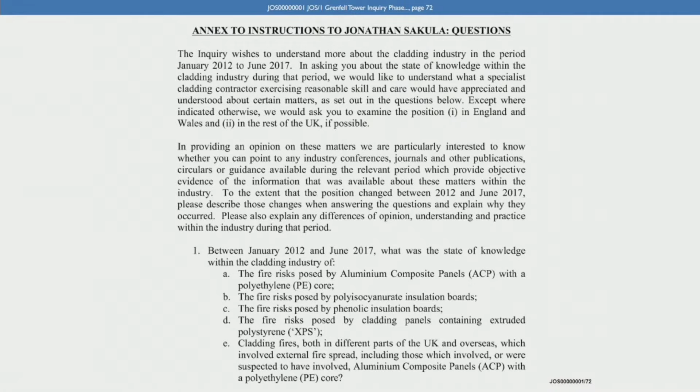And then we can see that below that you were asked a series of questions about the state of knowledge within the cladding industry of various matters, including in particular regarding the fire risks posed by the use of ACM panels, including with a polyethylene core. Now, I'm not going to read out all those questions at this stage. We will revisit many of those during your evidence today.

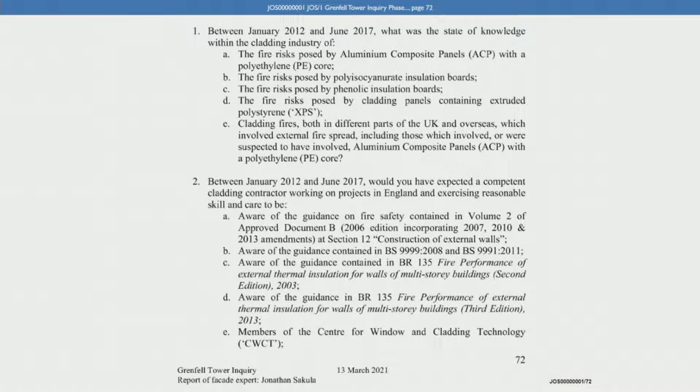Now, in response to those questions, you have produced a written report. If we go to the front page of that, so that's, yes, there we have it. So this is the front page of your report of the facade expert, and we can see there that it's dated the 13th of March 2021. And if we could go within the report to page 72, we can see the same date, the 13th of March 2021.

Yes. And is that your signature there? Yes. And to confirm, you've structured your report by chapter, each of which deals with the questions you were asked in turn. Is that correct? Yes. And are the factual matters set out in your report true to the best of your knowledge and belief? Yes. And does your report accurately set out your true and professional opinions on the matters you were asked to consider? Yes, it does. Thank you.

Now, I want to ask you some questions first about your background and experience. Now, in Section 3 and Appendix B of your report, you've outlined your background and experience relevant to matters to this inquiry. If we can turn to Section 3 at page 18 of this report, there you've set out in detail your background.

I'm not going to go through the detail of all of that, but I'm going to highlight some key points, which if you can just confirm. So is it right that you've worked in the construction industry for over 45 years and in the facade industry in particular for almost 30 years? Yes. And you have a degree in engineering from the University of Cambridge, and you are a chartered engineer, a fellow of the Institution of Structural Engineers, and a fellow of the Institution of Civil Engineers.

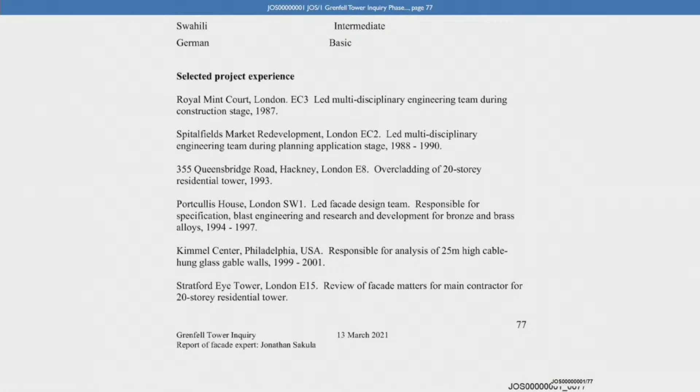At the bottom of that page, you've listed a number of projects under the heading Selected Project Experience. The final entry on that page is the Stratford Eye Tower, London E15. You say that was a review of facade matters for the main contractor for a 20-storey residential tower. Can you help us, roughly when was that project? When did that take place?

That would have been about 2002, 2003. And it sounds like that was a building over 18 metres if it had 20 stories, yes? Yes. And again, was that a refurb project or a new build? That was a new build.

And what did your review of facade matters entail? Well, in that case, I was working for the main contractor as the client, my client, and was effectively helping the contractor deal with technical submissions from their own specialist subcontractor. So it would have been reviewing drawings, reviewing the technical submissions, and so on. Yes, I see, so acting as a kind of checking mechanism for the main contractor in terms of the subcontractor's facade design. Yes.

And did that review of facade matters extend as necessary to checking compliance with building regulations and associated guidance? No, I don't recall it involving that. Do you have any other experience of rain screen overcladding projects on buildings over 18 metres? Not of overcladding projects, no.

Now I want to ask you some more general questions about the UK cladding industry. If we look at section 5 of your report on page 21, we can see you provide some information about the nature of the UK cladding industry. I want to pick it up at paragraph 5.1.3, where you say it may be helpful to explain briefly the nature and evolution of the UK cladding industry over the last 50 years.

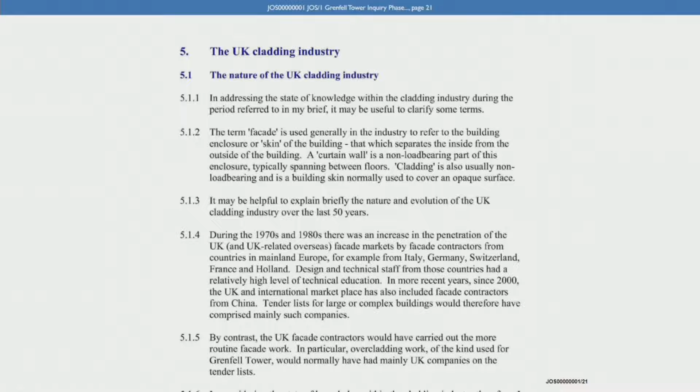You say in paragraph 5.1.5 that, by contrast, the UK facade contractors would have carried out the more routine facade work. In particular, overcladding work of the kind used for Grenfell Tower would normally have had mainly UK companies on the tender lists. So in terms of that paragraph, what type of work are you referring to when you refer to UK cladding contractors carrying out the more routine facade work?

Well, as I've said, overcladding work of the kind used for Grenfell Tower, but I mean also facade work in general for relatively low-rise buildings, maybe 10 stories or so, which didn't involve any particularly complex challenges.

And can you explain why the kind of work done at Grenfell Tower was in that category of more routine facade work? Yes, from a technical point of view, it wasn't particularly unusual what they were doing on the outside of the building. They were putting up rails and panels and insulation inside and so on. That's been done quite a lot in Britain, so that's why I call it relatively routine.

Can you help us understand why that work was ordinarily carried out by the UK facade contractors? Well, I would imagine it's because companies from outside Britain wouldn't have bothered to bid for relatively routine projects. They wouldn't have been that interested in those. They would have bid for ones where there was more of a challenge, and possibly more value for the overseas companies from a commercial point of view. I would say the profit margins on these kinds of projects in Britain would have been less attractive for an overseas company.

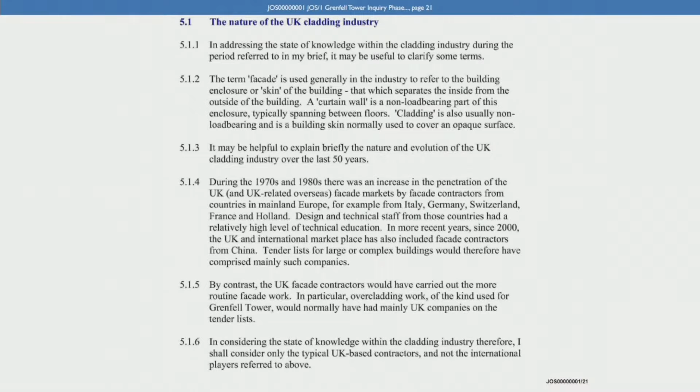You go on to say at 5.1.6 that in considering the state of knowledge within the cladding industry, you shall consider only the typical UK-based contractors and not the international players referred to above. Can you explain why you're only considering the state of knowledge by reference to those UK-based contractors? Well, because I've been asked to address the state of knowledge within the UK cladding industry, so it didn't seem relevant to consider the major international players.

Now, considering what you've said about the European and Chinese contractors penetrating the market from at the latest around 2000, can you help us as to whether the domestic cladding industry benefited from the increased knowledge and expertise of those international contractors when they entered the market? Yes, I would imagine they would, mostly through interchange of staff. People throughout their careers work for different companies and pick up knowledge from the places they worked.

So, in your opinion, did the domestic cladding industry benefit in terms of its technical knowledge and expertise from that penetration by international facade contractors? Yes, I imagine they probably did, yes.

Now, if we can turn to paragraph 2.3.2 on page 16 of your report. You say: in section 5, I give a summary of the nature of the UK cladding industry, differentiating between the UK-based cladding contractors dealing with overcladding projects such as on Grenfell Tower, and the top-tier international facade contractors. In considering reasonable skill and care, I'm considering that which is applicable to UK cladding contractors carrying out overcladding work similar to that on the Grenfell Tower refurbishment. While the level of technical expertise of such contractors may be slightly less than that of their international counterparts, I consider that the expected level of reasonable skill and care is the same.

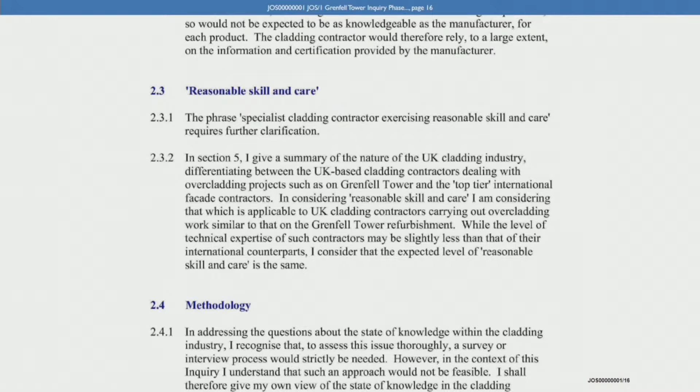So you're explaining the approach you've taken to the expected level of reasonable skill and care? Yes. And even though you've noticed this difference between technical experience and expertise, you've still applied a consistent standard to that question, is that right? Yes.

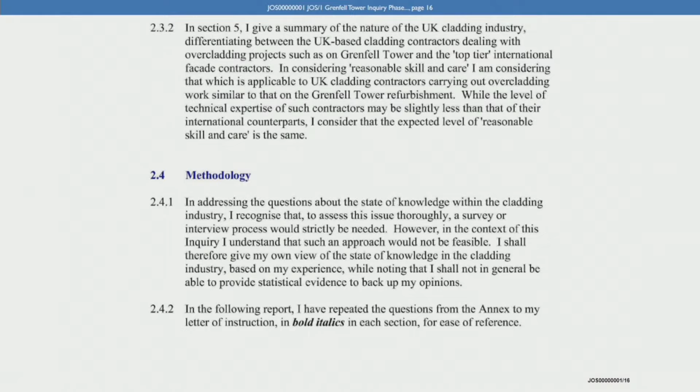You say at paragraph 2.4.1 that in addressing questions about the state of knowledge within the cladding industry, you're not able to provide statistical evidence to back up your opinions, and that your views are based on your own experience. Now, do you accept that the state of knowledge within the cladding industry can sometimes be inferred from widespread practices adopted within the industry? Yes.

And just turning now to manufacturers, I want to ask you some general questions about the relationship between cladding contractors and manufacturers. If we look at paragraph 2.2.3 on page 16, you say a cladding contractor deals with a wide range of products, so would not be expected to be as knowledgeable as the manufacturer for each product. The cladding contractor would therefore rely to a large extent on the information and certification provided by the manufacturer.

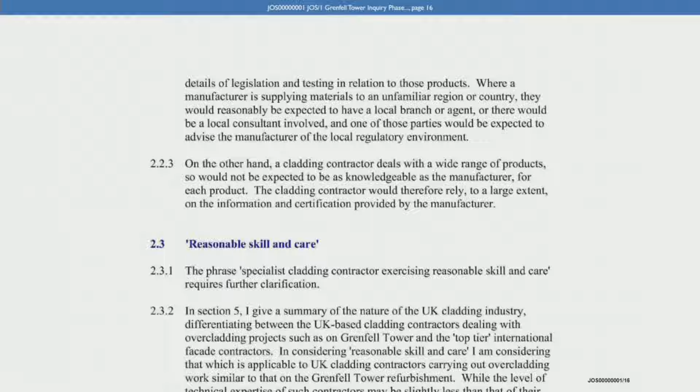Now, when you're talking about manufacturers there, just to be clear, are you referring to cladding manufacturers only, or would you include insulation manufacturers as well? Yes, I would include manufacturers of all products involved in the process, including insulation manufacturers.

And to what extent would you expect a reasonably competent cladding contractor to be reliant on manufacturers for advice about the fire safety of their products? I think they would be quite reliant upon them. The manufacturers are the people dealing very much with their particular product and would be expected to be very conversant with the legislation and about their product. The cladding contractors would rely on them to a very large extent, unless there was some reason to doubt the advice they were being given, in which case they might want to take independent advice on that.

What about suppliers or fabricators? To what extent would you expect a reasonably competent cladding contractor to be reliant on suppliers or fabricators of cladding products for advice about the fire safety of those products? By suppliers, could you define what you mean, as distinct from manufacturers? Middlemen between the manufacturer of the cladding panels and a supplier, often also a fabricator of those panels. I wouldn't expect the supplier and fabricator to be particularly knowledgeable on that sort of subject.

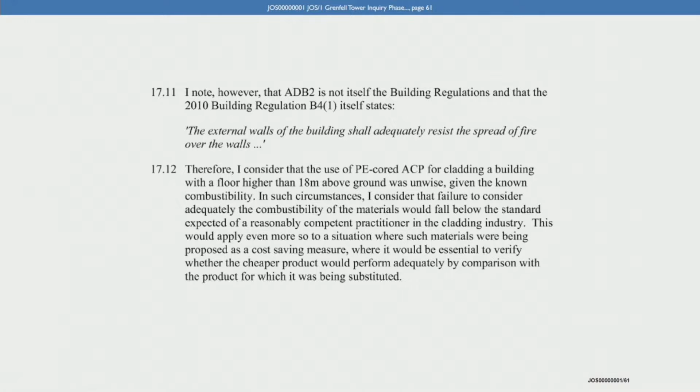Now, in your experience and in general terms, can you help us as to what regard was paid to the Approved Document on fire safety, ADB, in the cladding industry over the period 2012 to 2017? Well, I think most practitioners in the industry would have given very high regard to ADB2, and would have regarded that as being the thing that they needed to satisfy, rather than the original building regulation itself. Yes.

So, is it fair to summarise that it was seen by cladding contractors as an authoritative source of guidance to compliance with the building regulations? Yes.

And did that ever change over that period? Was there, as far as you were aware, ever a time when less attention was paid to Approved Document B on fire safety, or would that have been consistent throughout? I wouldn't say that less attention was paid to it, but I think during the period in question, leading up to 2017, I think there was a growing concern about the clarity of guidance given in ADB2, particularly Section 12.

Yes, I'm going to come back to that, because you make that point in your report, and particularly with reference to some of the other guidance that was available at the time. So I will come back to that.

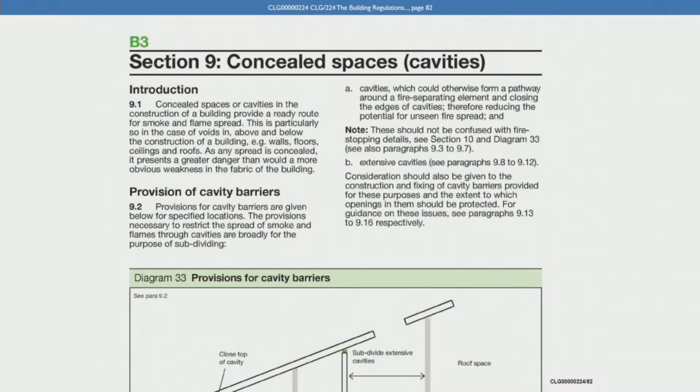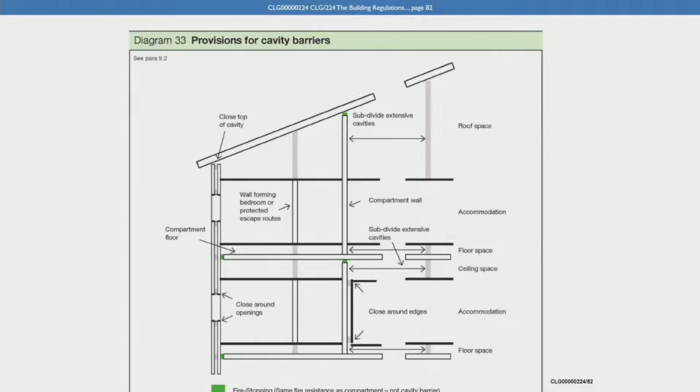And we can see below that we've got diagram 33, which gives guidance as to where cavity barriers, if we can just scroll down the page and look at diagram 33 in its entirety. Yes, so here we've got guidance within this document about the location of cavity barriers. And then we can see that guidance includes, on the left, close around openings, and you've got grey shading in the cavity there, and also close top of cavity further up that wall line. Do you see that? Yes.

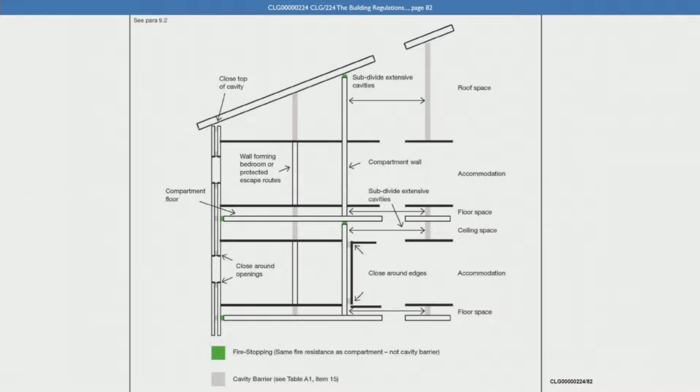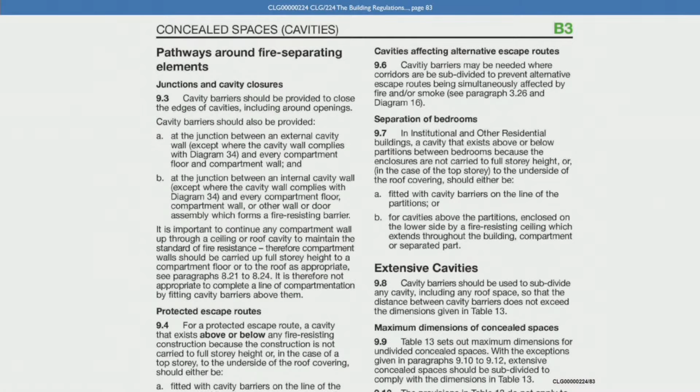And if we read on to paragraph 9.3 on the following page, we can see that it states cavity barriers should be provided to close the edges of cavities, including around openings. Do you see that? Yes. So again, would you expect that the reasonably competent cladding contractor ought to have been aware of the guidance in diagram 33 and paragraph 9.3 about the need for cavity barriers to close, including around openings? Yes.

And also, would you expect them to be aware of the guidance on closing the top of a cavity that's given in diagram 33? Yes.

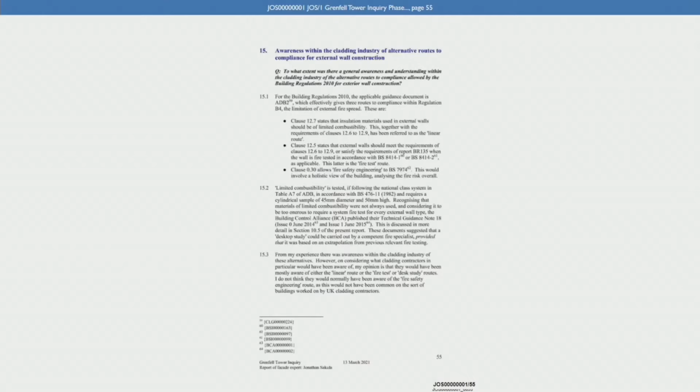Now, turning to the guidance on functional requirement B4 in section 12 of ADB, if we can go back to your report at this point, in section 15 of your report on page 55, you have explained at 15.1 that the building regulations and the applicable guidance document effectively give three routes to compliance within regulation B4, the limitation of external fire spread. And you've explained in the first bullet what you describe as the linear route.

So that's the guidance in 12.7 and clauses 12.6 to 12.9 of ADB, yes? Yes.

And then you've given guidance on what you're referring to in your report as the fire test route, which is clause 12.5 referring to the BR 135 document and BS 8414 testing, and that's the fire test route, yes? Yes.

And then you have referred to the fact that much earlier in Approved Document B, in the introductory paragraphs, clause 0.30 allows fire safety engineering to be carried out, which could involve a holistic view of the building, an alternative route to compliance. Is that correct? Yes.

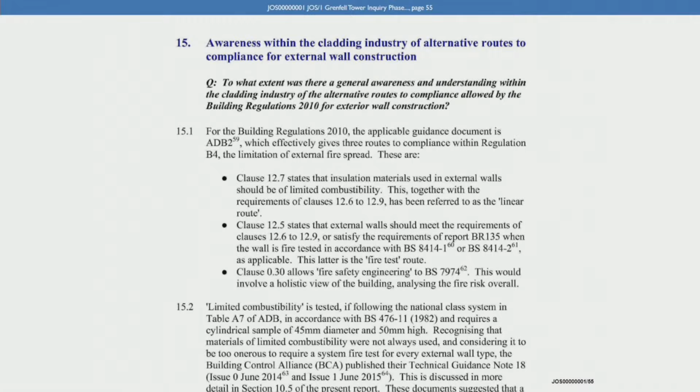Now, in your opinion, would the reasonably competent cladding contractor in the period we're concerned with, 2012 to 2017, have been aware of both the linear route and the BR 135, BS 8414 testing route in section 12 of ADB? Yes.

And in respect of that linear route, would you expect the reasonably competent cladding contractor to understand that assessing whether an external cladding system would adequately resist the spread of fire over the walls required consideration of the fire performance of each of the components of the cladding system, including the particular type of panel and the insulation specified for the system? Yes, yes.

And would you also expect them to understand that the requirements of the linear route were cumulative, i.e. compliance with only one of them was not sufficient? Correct. Yes, thanks. Now, some questions about the concept of desktop assessments as a route to compliance.

If we can stay with page 55 of your report and look at paragraph 15.2, you tell us there, you say limited combustibility is tested if following the national class system in table 7, A7 of ADB in accordance with BS 476 part 11, and then you explain what that requires.

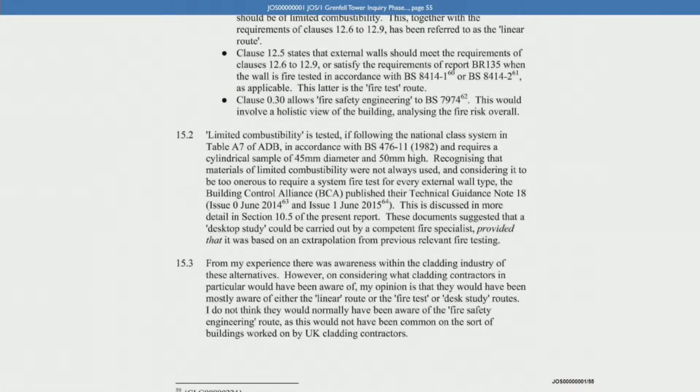Now, can you just help us as to how it was that cladding contractors were aware of the possibility of doing a desktop study as a distinct route of compliance in the relevant period, despite it not being identified separately in ADB? Is that solely because of BCA Technical Guidance Note 18, or was there a more general awareness in the industry about desktop assessments?

Well, I think it probably originated from Technical Guidance Note 18, but following that, I think the concept of a desktop study seemed to me to be quite common, but it must have originated from that note number 18.

Yes. And when you say the concept was quite common, well, commonly known? Commonly known, yes. Were you aware of many buildings where the desktop route was followed?

Yes, I think it was, because not every building was fire tested, and because not every building followed the linear route. The idea of desktop study as an alternative was not uncommon, and yes, I'm aware of some.

Yes. Now, sorry, can I just interrupt to ask this?

Why was it not reasonably feasible for people to follow the linear route if they couldn't follow the fire test route? I mean, why was it necessary to embark on the desktop study route at all?

Well, it's interesting because it may be that testing can show that materials which wouldn't satisfy the linear route could nevertheless be used in the system. For example, it may be within certain constraints that insulation which was combustible or partly combustible, used in a certain way, could nevertheless pass the test, and therefore one didn't have to go the linear route. So the desktop study was a way of saying, okay, if the condition I've got is rather similar to one which has already passed the test, then a specialist could say, well, yes, it's going to be all right then.

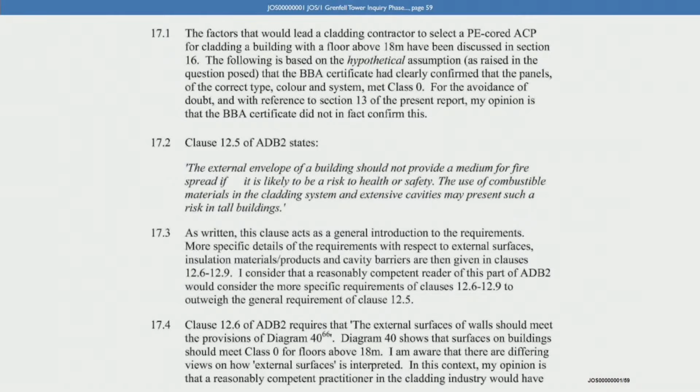So those are the introductory words to 12.5 of ADB, and you say at the beginning of the next paragraph, as written, this clause acts as a general introduction to the requirements. Now, appreciating what you say there about it being a general introduction to what follows in section 12, in your opinion, would the reasonably competent cladding contractor also have read this as a health warning, which should have been borne clearly in mind when the reader was considering the paragraphs which did follow from 12.5? Yes.

And can you help us? What weight or priority ought to have been given to that text of 12.5 when considering the paragraphs that follow, in your view? Well, I think the way I would read this, the way I think most practitioners in the industry would have read this, is that this is of an introductory nature. It says that the use of combustible materials may present such a risk. It then goes on to specify in more detail in the following clauses what the specific requirements were for the external skins of the building and the insulation and cavity barriers and so on. So I think those more detailed requirements in the mind of the reader would have outweighed the more general introductory requirements of 12.5.

Right, yeah. Now, if we look at the top of page 52 of your report, we can see that you were asked some questions by the inquiry about the awareness and understanding within the cladding industry of certain matters, including National Class Naught, the European classification regime, that's EN 13501, and the BS 8414 test route with the BR 135 criteria. Now, just focusing for a moment on the understanding within the industry of the European classifications and the national classifications, including National Class Naught.

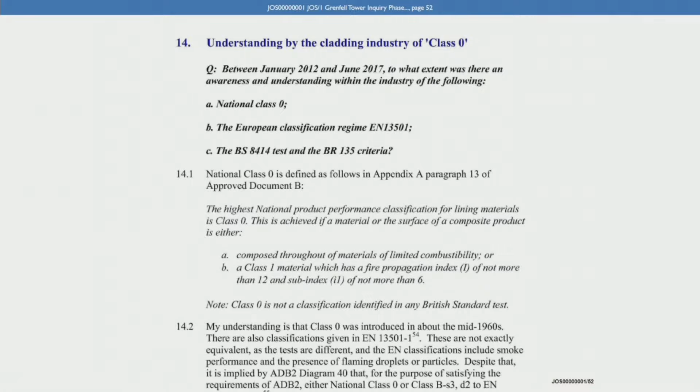If we look at page 53 of your report, in 14.9 at the bottom of that page, you say: BS EN 13501 gives the Euronorm classifications for resistance to fire as discussed above. It uses different test methods from those in BS 8414 parts 1 and 2, and also the classifications are different. And then you say: in my experience, UK cladding contractors during the period being assessed would not have been familiar with the EN classifications, and they would normally have referred to Class Naught. Manufacturers would probably have had a better understanding of the EN classifications, but would have tailored their approach in the UK to what the UK industry was familiar with, so would have referred mostly to Class Naught.

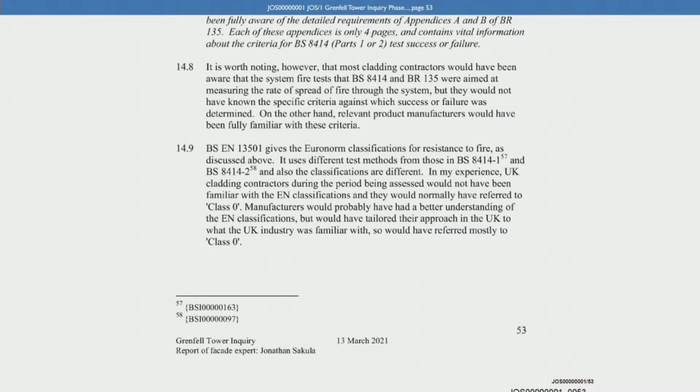Now, when you say there that the UK cladding contractors would normally have referred to Class Naught, do you mean that the reasonably competent cladding contractor would have been more familiar with the national classifications rather than the European ones? Yes. Can you help us as to why that was the position, in your opinion? I think it was just because of history. Class Naught predated, from the UK perspective, the EN classifications, and people hadn't quite absorbed the EN classifications yet. I think in the last 5 years it's probably changed, and things are a little bit different now. But at that time, people were still very much talking about Class Naught. Yeah, because that's what they were familiar with historically.

We know, however, that diagram 40 of approved document B does refer to the European classifications, so Class B, Class C, as well as the national classifications. That's correct, isn't it? Yes.

Were you aware that under UK procurement rules, specifications for public projects were required to be couched in terms of European standards to allow competition from European contractors? Yes. Now, taking those points into consideration, would you agree that the reasonably competent cladding contractor ought to have been familiar with the European classifications over the period 2012 to 2017? Well, this is interesting because you're talking about European procurement rules, and I suspect that the sort of projects we're talking about may have come below the threshold of requiring the European procurement rules to apply, I'm not sure. But should they have been familiar with those EN standards? Again, some would have been, some weren't. I can't say they should have been.

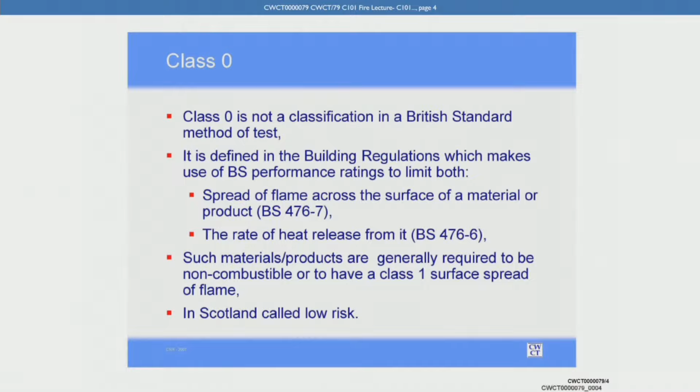And below that is another bullet that reads: such materials/products are generally required to be non-combustible or to have a class 1 surface spread of flame. Can I just check, how do you read that? Do you read that as suggesting that class 0 materials or products were generally required to be non-combustible or have a class 1 surface spread of flame? Yes, but I would also say that the definition of class 0 requires a class 1 surface spread of flame plus a certain rating in terms of heat release in accordance with Part 6. Exactly, yes, thank you.

And then if we can turn to the second course that you've referred to in your report, if we go back to page 31 of your report, 7.4.2.2, you've referred to a course CWDC, Curtain Walling Design and Construction for Building Professionals. That was a 4-day course given from 2007 onwards, so again, several years before the period we've particularly looked at, and included a lecture entitled Fire Performance of Facades.

And if we can look at the slides for that lecture, that's at CWCT 83. We can see that this is a lecture called The Fire Performance of Facades. And if we turn to page 6, we can see a slide entitled Spread of Flame this time, and it refers to class 0. Do you see that there in the first, BS 476?

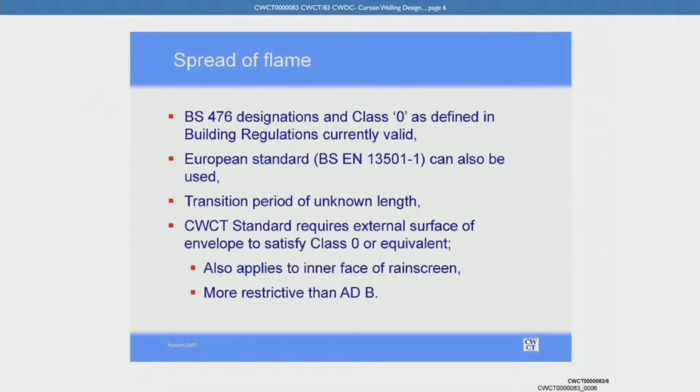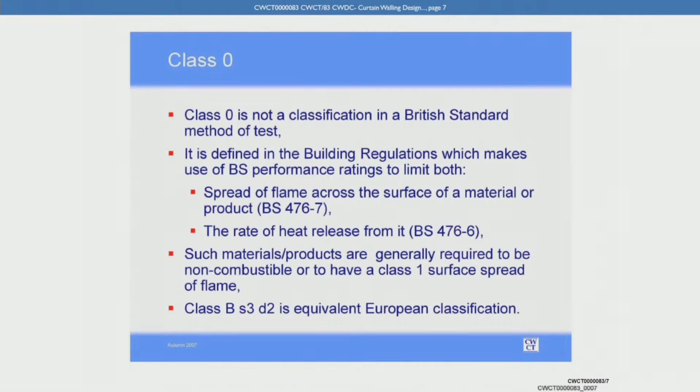And then if we go on to page 7, we can see exactly the same information is given about the nature of class 0, precisely what is tested, and that they're generally required to be non-combustible or have a class 1 surface spread of flame, yes? Yes. So bearing those course materials from the CWCT in mind, and just to be absolutely clear about your evidence, and I think this follows from your answer to the chairman's questions, but I'm going to pose it nevertheless. Do you consider that a reasonably competent cladding contractor ought not to have been confused as between class 0 and the combustibility of a material or product? Correct. Yes, thank you.

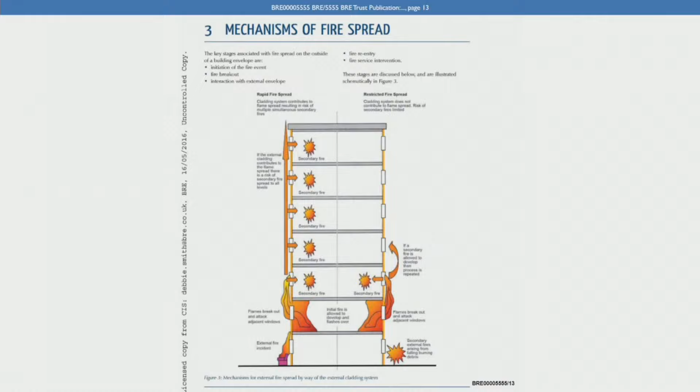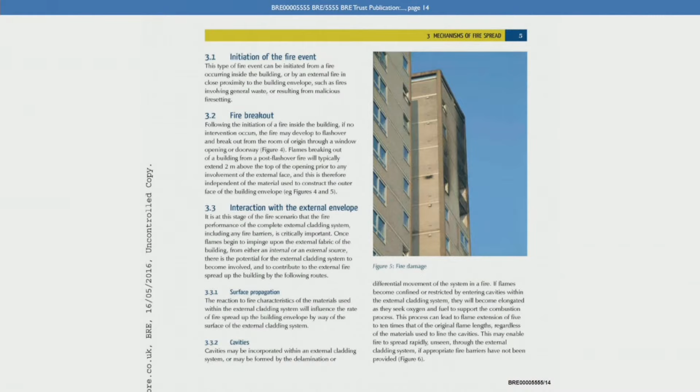And then on page 14, the next page, there are a number of warnings. So if we look at section 3.3, interaction with the external envelope, 3 lines down in that paragraph it says: once flames begin to impinge upon the external fabric of the building from either an internal or an external source, there is the potential for the external cladding system to become involved and to contribute to the external fire spread up the building by the following routes. And then a number of routes are identified.

Immediately below that, we see 3.3.1, surface propagation. The reaction to fire characteristics of the materials used within the external cladding system will influence the rate of fire spread up the building envelope by way of the surface of the external cladding system.

And then below that, we can see it says 3.3.2, cavities. Cavities may be incorporated within the external system or may be formed by the delamination or differential movement of the system in a fire. Reading on, if flames become confined or restricted by entering cavities within the external cladding system, they will become elongated as they seek oxygen and fuel to support the combustion process. This process can lead to flame extension of 5 to 10 times that of the original flame lengths, regardless of the materials used to line the cavities. This may enable fire to spread rapidly, unseen, through the external cladding system if appropriate fire barriers have not been provided.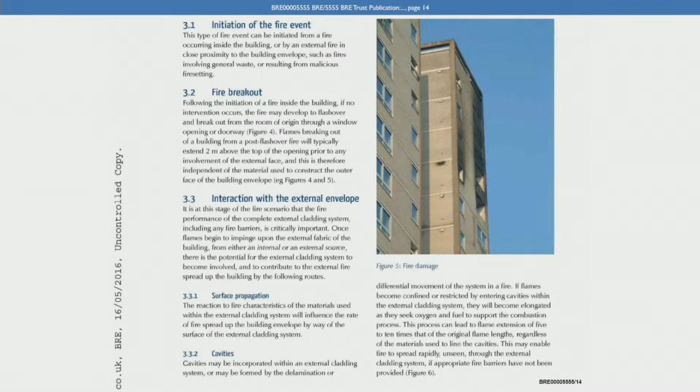Now, appreciating what you've said about whether a reasonably competent cladding contractor should have read this document in any detail, concentrating on those particular features I just took you to and those warnings about the potential for external fire spread, including in cavities, would you have expected a reasonably competent cladding contractor to have appreciated those potential features of fire spread in cladding systems? Yes, I would. So even though they may not have read this cover to cover, you would have expected them to have been aware of those features, including, for example, flame elongation in cavities. I think the specific example of flame elongation is quite specialised, and it's possible they wouldn't have been aware of that. But the other points made about the potential for fire to travel through, up and around the external cladding system, I think they would have understood that.

But specifically about flame elongation, perhaps not. And when you say they would have understood that, should they have understood that if they were embarking on a cladding project of the like of Grenfell Tower? Yes. Yes.

Now, going back to your report at page 41, section 10.3, at 10.3.3 you say, I would expect most cladding contractors in the period January... sorry, we've just read this, and you say that most would not have read or understood exactly how the tests were classified. Some more conscientious would probably have studied it.

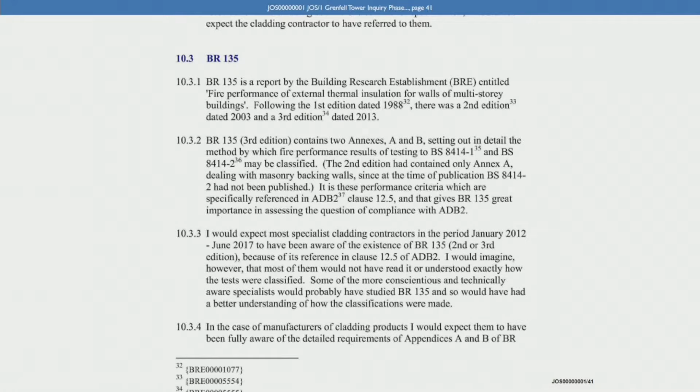Now, focusing on the tests under BS 8414 and how they were classified according to BR 135, do you consider that the reasonably competent cladding contractor, or at least someone within its organisation, should have understood how the tests were classified under BR 135, i.e. that there was pass-fail criteria? I'm sure they would have known there were pass-fail criteria, but they may not have known the details of how they were arrived at. Right, but ought they to have understood that once tested to BS 8414, there would then need to be a separate process of classification of the system under BR 135? Yes, because that's what ADB 2 says.

And how much should that reasonably competent cladding contractor have understood about how those classifications were arrived at in relation to the system? Well, as I said, I don't think they would have understood the details of how those particular classifications were arrived at. Right. But would they have understood that there would be a mechanism for assessing the extent of flame spread across that facade as part of that system, as part of that classification examination? Yes, to be clear, as I understand it, BR 135 talks about pass or failure, rather than classification. And they would have understood that it's a fire test. I'm not sure it was specifically about flame spread only. It was an overall fire test. Yes, and it's about temperature rise, etc. Yes, there's other aspects of it.

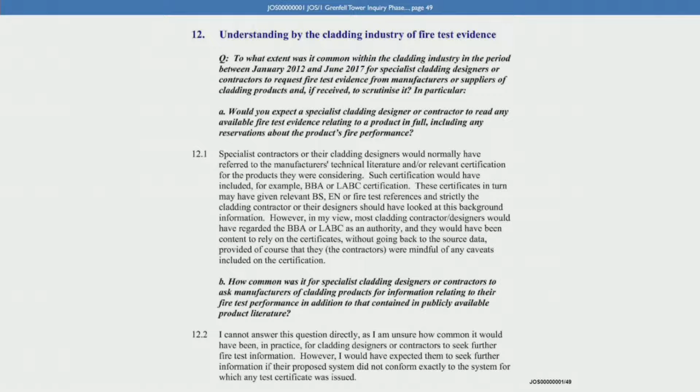And you answer at 12.2 below that, I cannot answer this question directly as I am unsure how common it would have been in practice for cladding designers or contractors to seek further fire test information. However, I would have expected them to seek further information if their proposed system did not conform exactly to the system for which any test certificate was issued. So, do you agree that it would be important that cladding contractors did understand enough about BR 135 and 8414 testing to be able to assess whether their system conformed to the system for which a test certificate had been issued?

Yes, I was thinking more about the BBA certificate, rather than any certificate produced by the test house, because they just give a report rather than a certificate.

But all I'm saying here is that if the tested system matched exactly what was being proposed to be built, I wouldn't expect them to go back and question the test. Whereas if there were some variation being proposed, then I would expect them to be questioning more what the original test was based on.

And would you expect them to understand that if going down the BR 135 8414 route, their system needed to replicate precisely the system that was tested? Yes, yes, so they'd need to know that much about it.

Another set of guidance documents that you refer to are BS 9999 from 2008 and BS 9991 from 2011. If we look at page 40 of your report, paragraph 10.2.3, you explain that these codes of practice contain information covering a range of topics relating to fire. Taking BS 9991 as an example, there are 10 sections. For the purposes of a cladding contractor, the important part, in my opinion, is section 6, covering design for construction.

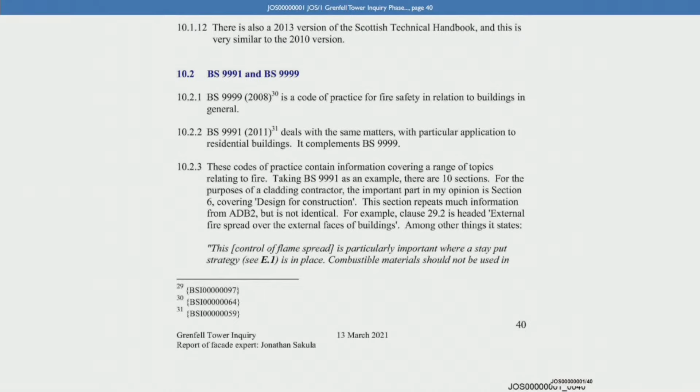This section repeats much information from ADB2, but is not identical. For example, clause 29.2 is headed external fire spread over the external faces of buildings. Among other things, it states, control of flame spread is particularly important where a stay-put strategy is in place. Combustible materials should not be used in cladding systems and extensive cavities. So you've noted that there's that particular piece of guidance in BS 9991, which we don't have in ADB2, yes?

Mm-hmm, yes. Let's look at that in BS 9991. This is in the 2015 version, which we find at BSI 59. We can see the full title of that British Standards Institute publication, Fire Safety in the Design, Management and Use of Residential Buildings Code of Practice.

And then at section 18.2 on page 86, we can see, if we read just the first few paragraphs under 18.2, headed external fire spread over the external faces of buildings, it states: external walls should be constructed using a material that does not support fire spread and therefore endanger people in or around the building. Flame spread over or within an external wall construction should be controlled to avoid creating a route for rapid fire spread, bypassing compartment floors or walls.

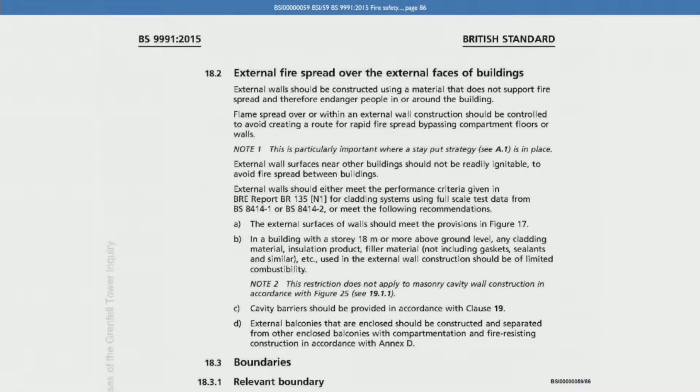And then there's a note 1. It says there, this is particularly important where a stay-put strategy is in place. Now, based on your experience, would a reasonably competent cladding contractor have an awareness of and an understanding of this part of BS 9991? I don't think they would have been aware of this particular part in a general sense.

I do think, had it been referred to in their specification or contract documents, they would have been made aware of it in that way. But in a general sense, I don't think they would have been aware of this.

More generally, would they understand what a stay-put strategy was and its significance in the context of external facade design? I can't really say. You would have thought so, but I'm speculating about what a third party understood by something. I understand, I don't know.

But to your knowledge, was a stay-put strategy something that was understood in the cladding industry between 2012 and 2017, in terms of what that meant? I can't answer categorically, but I would say on the balance of probabilities, probably yes.

And you suggest at 10.2.5, page 41 of your report, that you would expect a cladding contractor to be aware of the existence of BS 9991 and BS 9999, but not to be familiar with their contents, yes? Yes, mainly because, as I've said, much of the information, in fact most of the information, is a repeat of the requirements of ADB2. They probably wouldn't have thought it particularly significant to read these in detail.

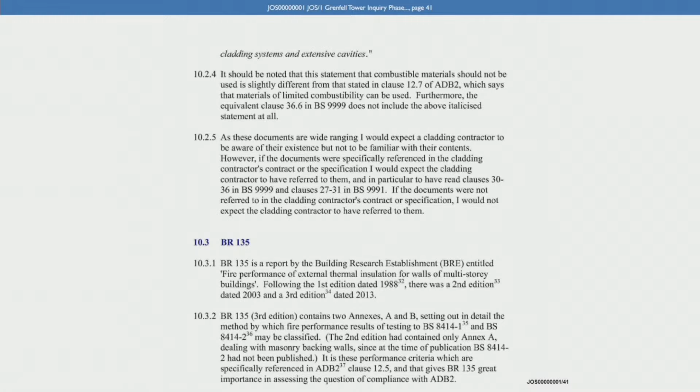Yes, and you make that point at 10.2.5 on page 41. You say, however, if the documents were specifically referenced in the cladding contractor's contract or the specification, I would expect the cladding contractor to have referred to them and in particular to have read clauses relevant to external flame spread in those documents. In your experience, were these British standards routinely included in a cladding contractor's contract, or were they routinely omitted?

From memory, I would say it was typical to include them.

Just thinking more generally, not specifically about these British standards but more generally about guidance, would you expect the reasonably competent cladding contractor who subcontracts some or all of their work package, say the design element, to another contractor, would you expect them to have referred that subcontractor to any guidance documents or standards that were in the contractor's contract?

Yes. And would you expect the reasonably competent cladding contractor to have a system to ensure that these were appropriately considered by the relevant subcontractor? Yes.

And would you also expect the cladding contractor to have a supervisory system to ensure that the work produced was compliant with statutory compliance as well as any relevant guidance documents or standards? Yes. So some form of checking regime which went beyond simply ensuring that a subcontracted designer kept to programme, yes? Yes.

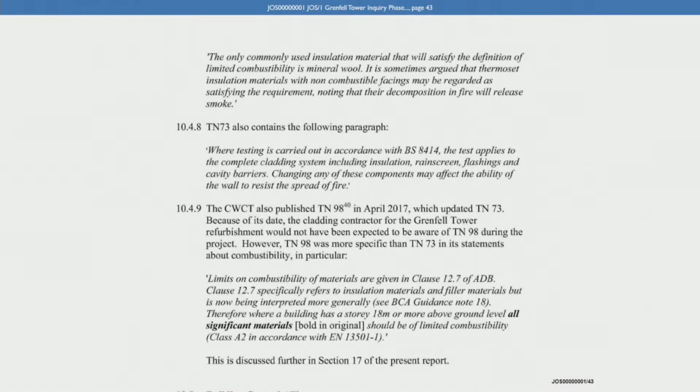So you go on and highlight two particular excerpts from Technical Note 73 at the top of page 43. But to confirm, is it your evidence that you would expect a cladding contractor to be familiar with the entire contents of Technical Note 73, not just these warnings? Yes.

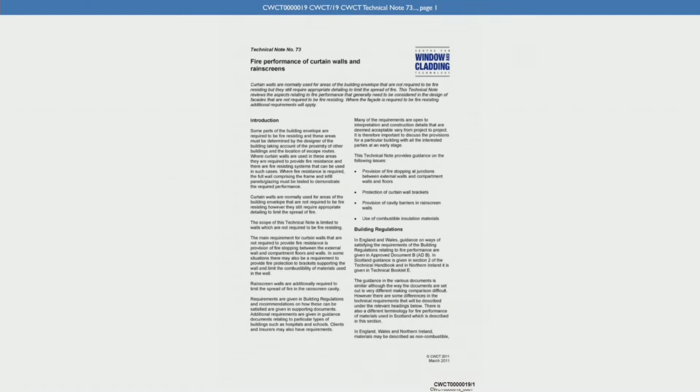If we turn to that Technical Note 73 from March 2011, that's at CWCT 0000019 at page... if we just turn up to the front page first. There we have it, we can see the date in the bottom right-hand corner, March 2011.

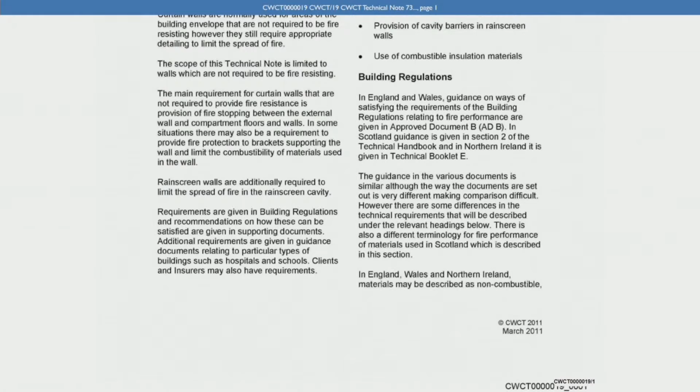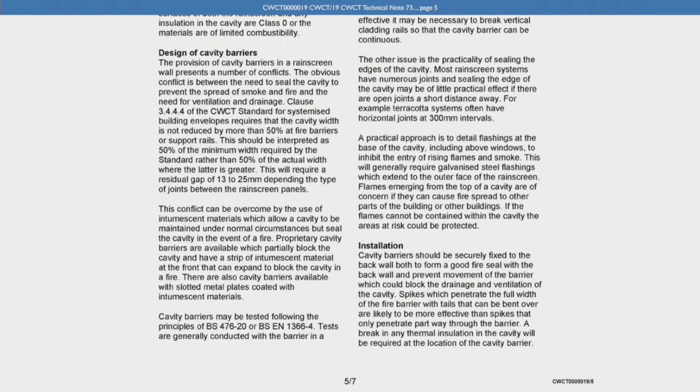And if we could look at page 5, we can see in the bottom left-hand column and over to the next column, a paragraph where it says: cavity barriers may be tested following the principles of BS 476 Part 20 or BS EN 1366 Part 4. Tests are generally conducted with the barrier in a cavity between walls of fire-resisting construction, and performance with rain screen panels may be different. Do you see that there? Yes.

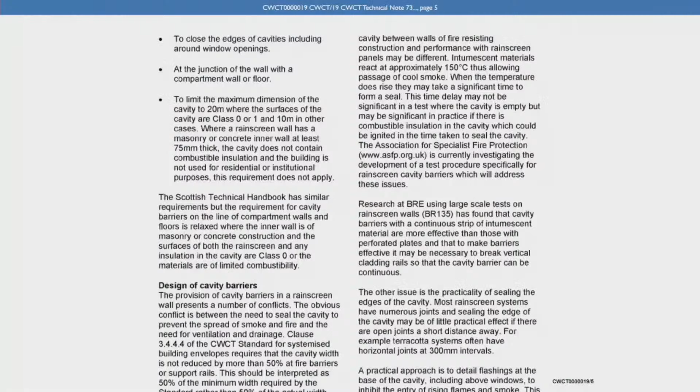Now, would you expect the reasonably competent cladding contractor to have any familiarity with those test standards I just read out, at the bottom of the left-hand column - BS 476 Part 20 and BS EN 1366 Part 4? Those are fire resistance tests. Would you expect the reasonably competent cladding contractor to have any familiarity with those fire resistance tests? No.

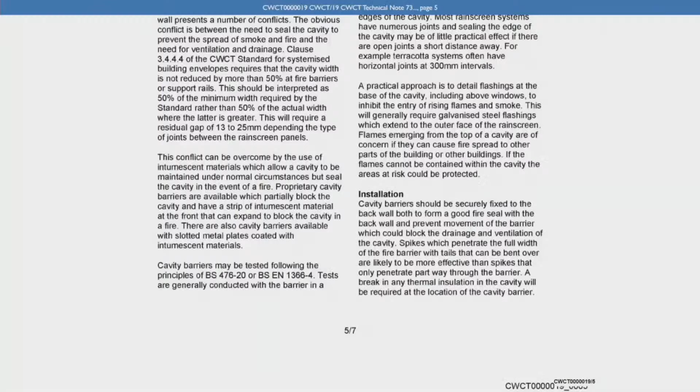But just to be clear, that part that I then read out at the top of the right-hand column, where it says that tests are generally conducted with the barrier in a cavity between walls of fire-resisting construction, and performance with rain screen panels may be different - you would have expected the reasonably competent cladding contractor to have appreciated that, would you?

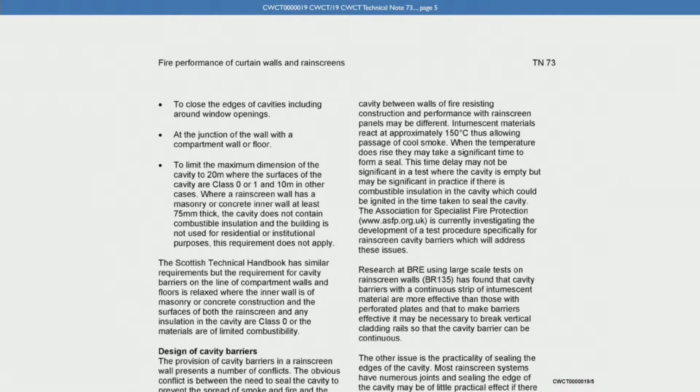Yes. But that's intuitively obvious whether or not it's written here. I appreciate you're saying it's intuitively obvious. Can you just explain that for us, why you say that? Well, because if they're differentiating between walls of fire-resisting construction, you would expect that behaviour in fire to be different from that of a rain screen panel. Yes, I see. That's all.

Now, going to your conclusions of your report and staying with the CWCT standards, this is page 67 and paragraph 20.14. So looking at 20.14, you tell us that the CWCT, based in Bath, is the main technical umbrella organisation for facade technology in the UK. I would expect all cladding contractors to have been aware of the contents of the CWCT standard, that's the standard for systemised building envelopes, in detail, and to have been aware of the subjects covered by the CWCT technical notes, reading specific notes as required.

And you go on and say, for example, technical note 73. So just to be absolutely clear, would it be fair to say that you would expect all reasonably competent cladding contractors to have considered both the CWCT standard for systemised building envelopes and technical note 73 if they were designing an overcladding of a, say, high-rise building? Yes.

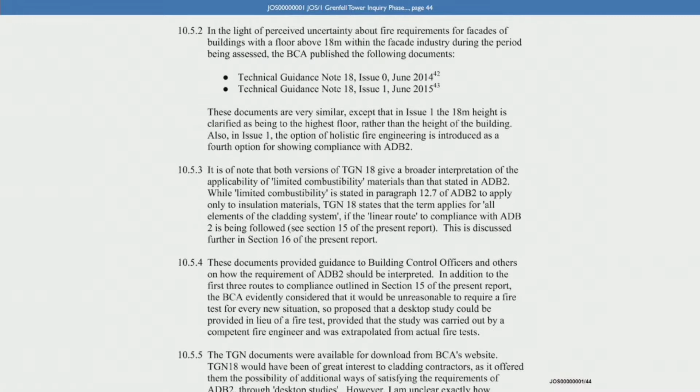And you tell us these documents are very similar, except that in Issue 1, the 18-metre height is clarified as being to the highest floor rather than the height of the building. Also, in Issue 1, the option of a holistic fire engineering approach is introduced as a fourth option for showing compliance with ADB 2. Now, going back to the first line of that paragraph, where you say that there was a perceived uncertainty about fire requirements, which led to this BCA publication - can you just help us? What precisely was the perceived uncertainty that you're referring to there?

Well, I'm referring to the fact that Section 12 of ADB2 wasn't particularly clear in what it meant. And it's your understanding, is it, that it's that then led to the BCA entering the field and giving guidance in this way? Yes, I would also add that...

I think also there must have been - and this is to some extent speculation - but there was probably a bit of a backlash about the industry thinking, well, do we have to test every facade for every condition? And the BCA came up with this idea of a desktop study as a means of getting around the fact that not every system had to be tested, so that an intelligent, specialised assessor could say, well, the system you're proposing is sufficiently similar to the one that's been tested that will allow it to pass building control. So I think it was probably in response to that pushback from the industry that TGN 18 came out.

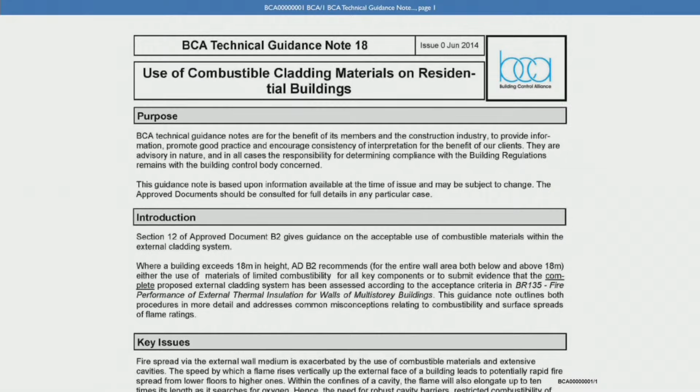So is it right, and was it well understood, that these guidance notes were intended for a broader audience than simply building control officers or members of the BCA? Yes.

And in your experience, would the reasonably competent cladding contractor have been in receipt of updates from the Building Control Alliance, the BCA? Well, yes, as I've said in my report, it's hard to say for sure how they would have received this information. Certainly within the consultancy world, I think we were aware of this. I would imagine the reasonably competent cladding contractor would have been aware of it because it would have been in their interest to be aware of it, but I can't provide any actual evidence for how they would have been aware of it.

Just to be clear, we don't need to turn it up, but as you've referred to at paragraph 10.5.5 on page 44, you say you're unclear exactly how cladding contractors would have been alerted to their existence, except by word of mouth among peers and through the relevant technical press. Yes.

Is it possible that one example of the way a cladding contractor may have become aware of this guidance is through updates published by the National House Building Council, the NHBC? Yes, if they included this material in that, yes.

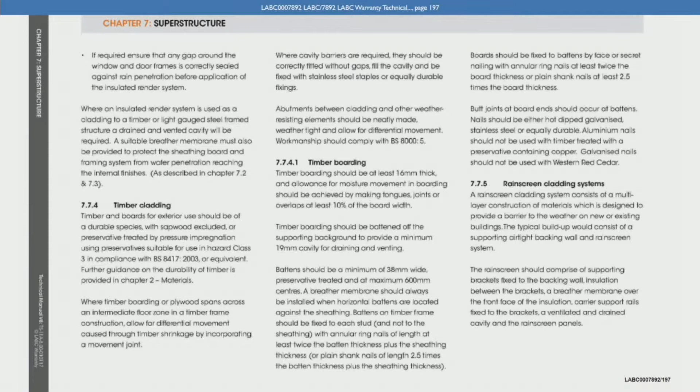And there's some text there. If we turn over to page 198, still in the same section, it says in the top left-hand corner, rain screen systems should have third-party certification confirming satisfactory assessment and comply with the requirements of the CWCT standard for systemised building envelopes. The collation of individual testing of components does not provide an overall performance of the rain screen or backing wall. Do you see that there?

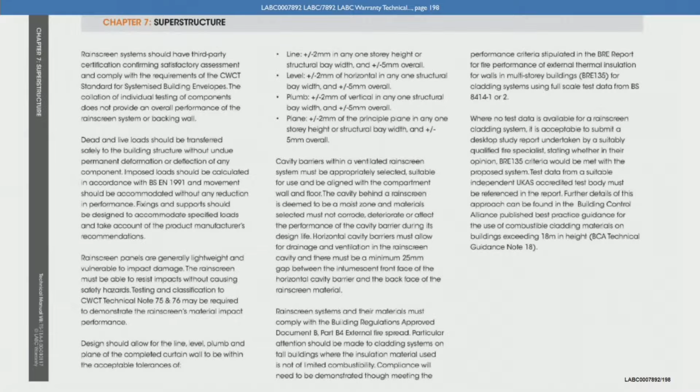Yes. So can we agree that even if the curtain walling section of the LABC Warranty Technical Manual did not apply to the cladding or rain screen cladding, this section incorporates the same requirement, including to comply with the CWCT standard for systemised building envelopes? Yes. And also to have third-party certification? Yes.

Now, just stepping back and thinking about industry guidance documents and standards more generally, would you agree that guidance documents and more formal standards can quickly go out of date once they are published. Yes. Do you consider that the reasonably competent cladding contractor has an obligation to interrogate and question guidance and standards?

I think it would depend on the date. If you were in 2013, for example, looking at a standard dated 2010, you wouldn't have any particular reason to question it. If you were looking at one dated 1980, you would be foolish not to question it.

Do you consider that the reasonably competent cladding contractor ought to be able to identify where it was clear that particular guidance had become out of date compared with other industry guidance? Sorry, I missed the first part of your question. Do you consider that the reasonably competent cladding contractor ought to be able to identify where it was clear that particular guidance had become out of date compared with other industry guidance?

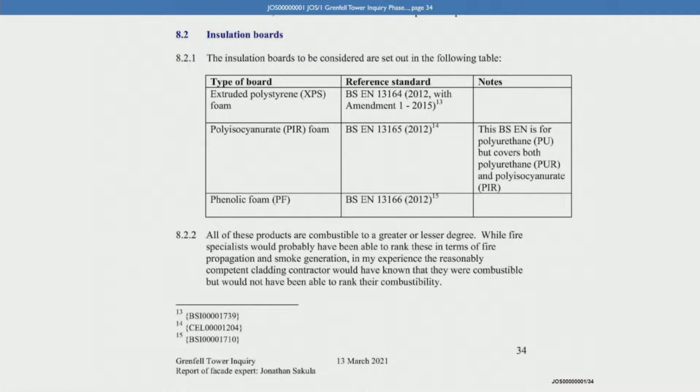So just to be clear, when you talk about fire specialists being able to rank the products, do you mean that they would be able to examine the test data and classifications for each product and determine an order, say, of combustibility or an order of smoke production? Yes.

And you've told us very clearly there that the reasonably competent cladding contractor would have known that these insulation products were combustible but would not have been able to rank them. Would it follow from that the reasonably competent cladding contractor should have understood that the use of such combustible materials on a building over 18 metres in height entailed a fire risk? Yes.

Now, in terms of the knowledge within the industry of cladding fires, if we could turn to page 35 of your report. Here you've set out a table of what you describe in paragraph 9.1 as a number of important fires involving external fire spread, giving the date, location, and notes. That table goes from page 35 over to page 36, taking us right up through to June 2016.

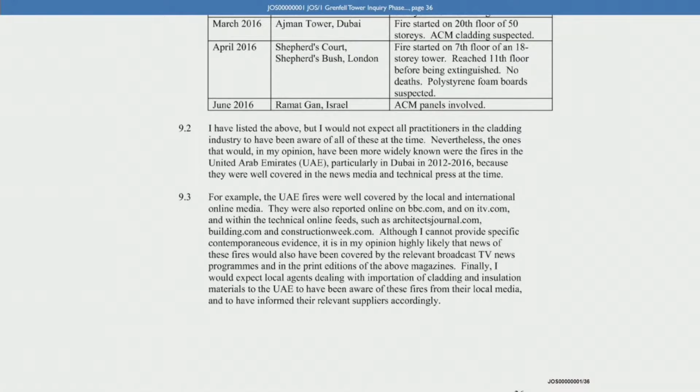Now, just going back to 9.2, where you tell us that you would have expected the reasonably competent cladding contractor to have been aware of some of the fires in this table - is it only the UAE fires that you would have expected them to be aware of, or would you have expected them to be aware of at least some of the others as well? I would have expected them to have been aware of the UAE fires. They might have been aware of some of the others, but I wouldn't have expected that.

Now, it's been suggested to the inquiry that cladding assemblies in the UAE may have been different to the type of cladding assemblies typically used in the UK. Is that something that you're aware of or you can help us with? For example, in the UAE, typically cladding assemblies did not have insulation, and those that did had a thin layer of glass wool or stone wool. Can you help us with that? No, I can't, I'm afraid.

No, fair enough. But I'm slightly surprised at that, because although obviously it's a different climate, the insulation requirements are still there because you're trying to keep the cool of the building in. Yes, it's because they're heavily air conditioned.

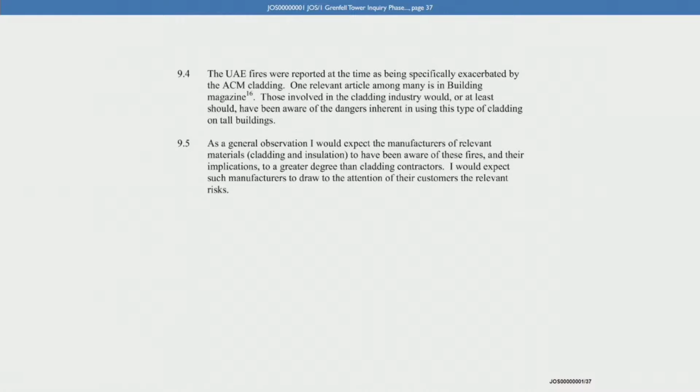On this theme, if we go to page 37 of your report, paragraph 9.5, you say there, as a general observation, I would expect the manufacturers of relevant materials, cladding and insulation, to have been aware of these fires and their implications to a greater degree than cladding contractors. I would expect such manufacturers to draw to the attention of their customers the relevant risks. And just to be clear again, do you draw any distinction there based on the fires that you've seen and what was in the technical press about what you would have expected of a cladding manufacturer as compared to an insulation manufacturer in terms of what should have been done about notice taken of these fires?

Well, it's interesting. I think both the insulation manufacturer and the cladding manufacturer should have been aware, because some of these fires were the result of insulation burning and some due to the cladding burning, and some were the result of both.

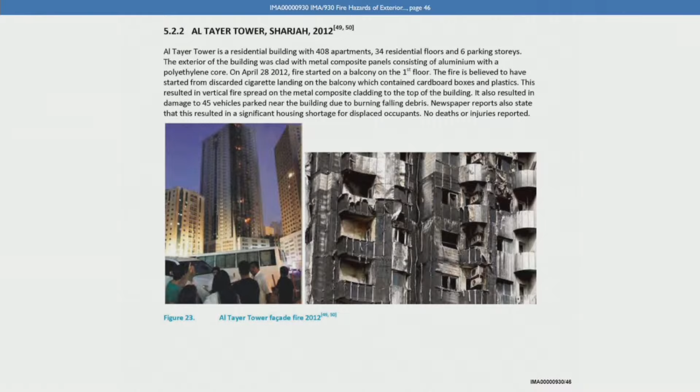Here we can see we've got reference to the Al Tayer Tower in Sharjah 2012, and reading two lines down in the text, the exterior of the building was clad with metal composite panels consisting of aluminium with a polyethylene core, yes? Yes.

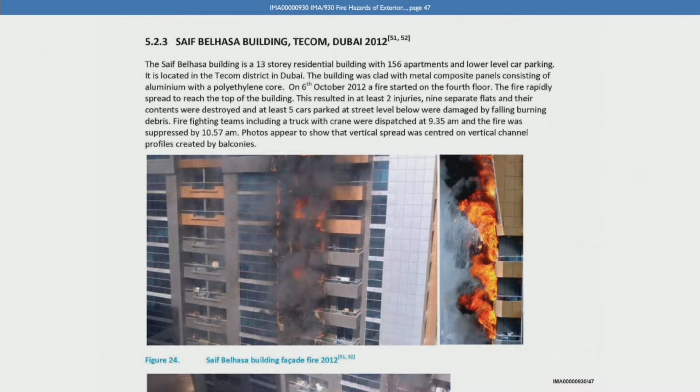So we can see it's not just that you learn it's ACM, but also it's ACM-PE. And the same is true on page 47 - this deals with a different fire in Dubai in 2012. Again, second line down, the building was clad with metal composite panels consisting of aluminium with a polyethylene core.

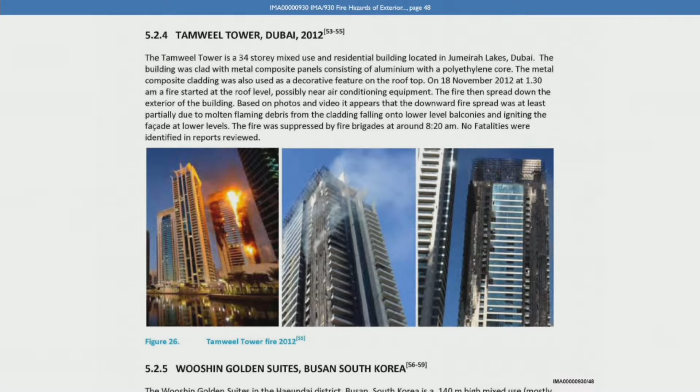So you've told us that about the attendance at this cladding conference. And I think we do see individuals from Kingspan, do we not, on that attendance list? Yes, if you say so. You can take it from me that there's individuals from Kingspan who attended. Yes, it's consistent with what you've said there about it comprising mainly manufacturers and consultants.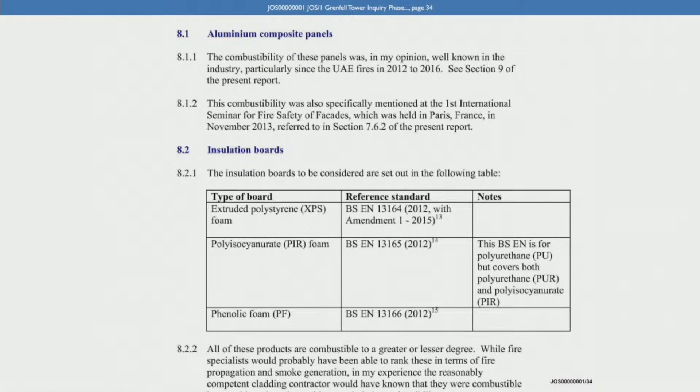Absolutely, yes. And I think the important point is that these conferences took place at all. These are not just fire conferences or cladding conferences - these are specific conferences about fire risk in cladding. So whether or not people attended, the fact that people thought it was a big enough problem to have a major international conference in 2013 and again in 2016.

Now, taking into account your evidence that the combustibility of ACM panels was well known in the industry, do you agree that the reasonably competent cladding contractor would have been aware not only of the occurrence of the UAE cladding fires in 2012-2016, but also the causes of those fires?

Yes. So including the fact that they involved ACM PE. Yes. To be clear, the ACM panel didn't cause the fire, it propagated it. I see, if that makes sense, yeah. Would they have been aware that the ACM PE propagated the fire? Yes.

And so just to be clear, the reasonably competent cladding contractor would have been aware that ACM panels with a polyethylene as opposed to an FR core had been involved in a number of these fire incidents on high-rise buildings? Yes.